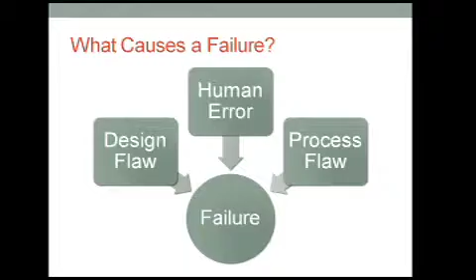Now, when you look at this simple diagram, the mirror image of this diagram are the components to success, right? What are the components of success? A good design, good product that you're using, a good process that you're using to assemble the products, and then, of course, execution, right? Flawless execution. And so those things are pretty critical.

And what I want to do is take a look in terms of those simple concepts at what apparently went wrong, I think, on this well, and then how do we go to build our practices going forward to try to keep this from going wrong again.

Okay, first off, and this one has been overlooked and maybe not stated as clearly as I'm stating it right now, the float equipment failed in the well. To me, that's very, very obvious as a drilling person. The float equipment failed. If the well blew out up the casing, the float equipment is there as a barrier, and it failed. Why did that happen?

Is there a design flaw in that float equipment? Were there process flaws that were involved in the selection of that particular piece of float equipment? Did something go wrong there, or was there simply a human error in the installation of that float equipment that kept it from working properly?

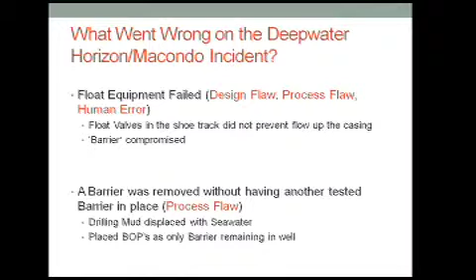When the float valves in the shoe track don't work following a cement job, that is not a good situation, and it's even worse when it goes unrecognized, which is apparently what happened in this well. So there's one barrier compromised. Did it cause the incident? No, it's the kickstart to the incident right there.

The second one that I have listed here, a barrier was removed without having another tested barrier in place. Now, throughout my career, that's what I was taught to not do. One of the fail-safe practices and processes that we have to follow as a drilling engineer is to make sure that if you remove a barrier from a well, there's another barrier in place before you remove it. That's a process that you have to follow to make sure that works right.

And that clearly failed in the Macondo. And that one is a pure process error. The sequencing of removing the drilling mud from the well and putting seawater in place was wrong. And that's a very severe flaw.

Now, as I'm going to show in a little while, when you start having process issues, these are issues that at some point the regulatory agencies have to come in and help prevent. And when the drilling mud begins to be removed, you've already compromised one barrier in the float equipment, you take the drilling mud out of the well, the last barrier in the well becomes the blowout preventers.

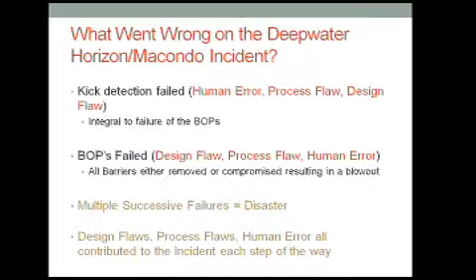And then finally, the BOPs failed. Now this, from my perspective as a drilling engineer, and a man that's been on the rig as a company man and has had people working for me that I've known for years as company men, that's a very terrifying thought to have a BOP fail on you, because that is your fail-safe.

So my question really is, what happened with the BOPs? I don't know that answer yet. I haven't seen any study outcome of what happened with the BOPs, but it's a very, very worrisome topic that you went to function the BOPs and they didn't work. And of course, in that system, is there a design flaw? We need to know that.

Is there a fundamental design flaw in the way the BOPs were thought out that doesn't work in deep water subsea environments? Were there process flaws in the way those BOPs were tested? Are we testing our BOPs correctly? And that's a comment I'll expand on in just a second.

And then, of course, finally, is there a human error component? And I would say in both of the cases of the kick detection and the BOPs, the kick detection, I think primarily human error and process error, probably equal amounts of both of those. Okay, but with the BOPs, I think design and process are probably the two key points of those failures.

Of course, what happened now, multiple successive failures, and people said this from day one of the blowout. You know, this wasn't one thing that went wrong. There were multiple successive failures that led to this disaster. And these are the four successive failures that happened in my mind.

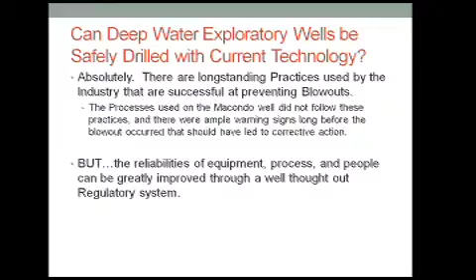Okay, in a conclusion slide, one question: can deep water exploratory wells be safely drilled? Yes, we've done it. There are a number of people sitting in the room who say, I do this every day. Is it 100%? No, I don't think so. I think there are people out there that don't have the capacity to do it safely well after well after

well. And I think that we're going to have to work with the government, with regulatory agencies, to get the reliabilities in our designs, in our process, and in our people up to speed to make sure something like this never happens again. Thank you very much.

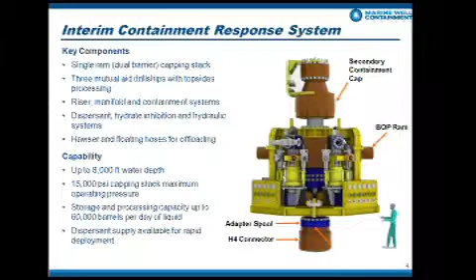Some of the equipment that is in the asset inventory for the interim response system obviously will move to the expanded response system as we get other assets for that system built and ready for deployment. But one main difference is the capture vessels. For the expanded response system, the capture vessels are dedicated vessels, where before it was the drill ships through mutual aid. In the expanded system, we'll have 2 modular capture vessels. I'll speak in more detail about them on a later slide, but they are dedicated for the service. They'll need to be modified for topsides processing facilities, and that's part of the scope in the project development of the expanded system.

This system will have freestanding risers and manifold systems, and that will enable it to operate in deeper water depth. It will also have a 15,000 PSI subsea containment assembly. In the expanded system, that assembly is a 3-ram or 3-preventer type capping assembly. In the interim system, it was single. The storage and processing capacity in the expanded system is up to 100,000 barrels per day of fluid. And again, the dispersant supply is dedicated and available within this system as well.

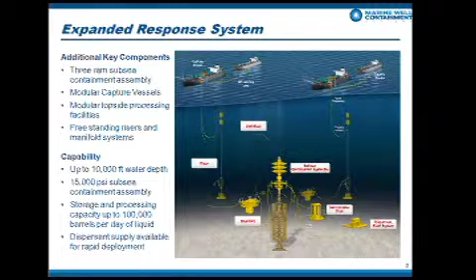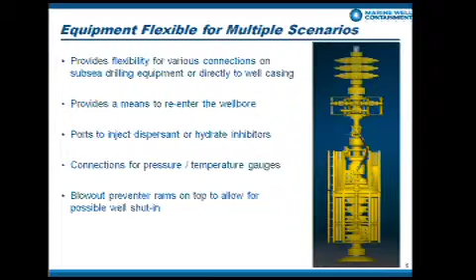I used the word flexible in an earlier statement, and that can be indicated by a component shown on this slide. This is a depiction of the ultimate expanded system capping stack. The idea is that we will have adaptation for this capping stack to be configured or mated to whatever conditions may arise on the day of deployment. It will provide a means to re-enter the wellbore. It will have a port for injection of dispersants or hydrate inhibitors, and connections for pressure and temperature monitoring devices. And we'll have containment type preventers in the stack to allow for a possible complete shut-in.

Some modifications are required, namely dynamic positioning systems, and these vessels need to be outfitted with topsides appurtenances to accept processing modules that connect up to subsea riser systems that allow the contents to flow to the capture vessels to be separated, the oil and gas separated, the gas flared, and then safely store and offload that oil to a shuttle tanker. The shuttle tankers are not part of the system.

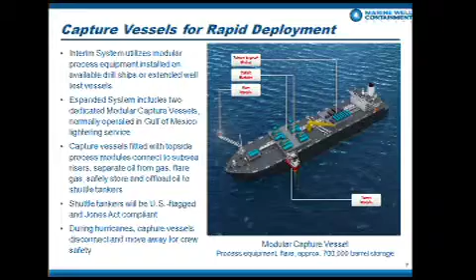Well, that's a quick run-through of what the company is about and the system that the company is interested in and also diligently working toward. And our view is that the company and that system will provide us a solution to meet the containment requirements and response requirements that we see in our drilling permit application requirements today.

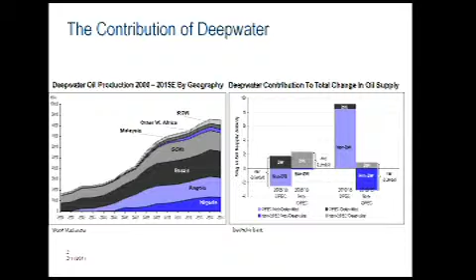So I think we heard very succinctly this morning about what's at stake when it comes to deep water. And you can see the remarkable growth on the left-hand side of the plot there of deep water production from the turn of the millennium through where we are today. This particular graph is forecasting 5 years into the future as well. On the right-hand side, a little bit difficult to see, but this analyst is forecasting that deep water will contribute about 25% of the incremental net oil production over the next 5 years. So there's a lot at stake, as it was said this morning.

With regard to technology, when you look at the graphs that I showed you on the previous slide, particularly the one on the left, you could come to the conclusion that this is a new industry, and in fact, it's not.

The offshore industry has been around since before the turn of the last century, 1897, as you can see, and even earlier than that, actually. And as pointed out this morning, just over 60 years ago, the first well was drilled out of sight of land, which was a very important point in the offshore industry.

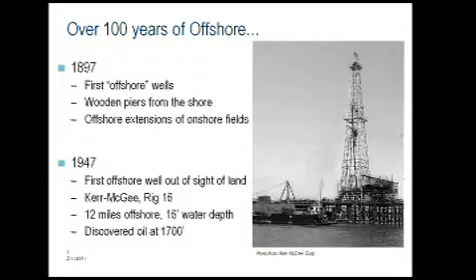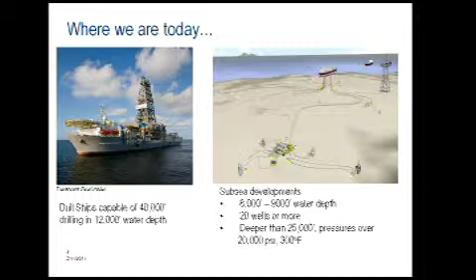So where are we at today? To me, the technology that we're using offshore is extraordinary. What the industry has been able to achieve is absolutely remarkable. A state-of-the-art development today would be in 8,000 feet of water, with 20 or more subsea wells, pressures at the reservoir, not at the wellhead, of 20,000 psi and greater, and depths certainly over 20,000 or 25,000 feet.

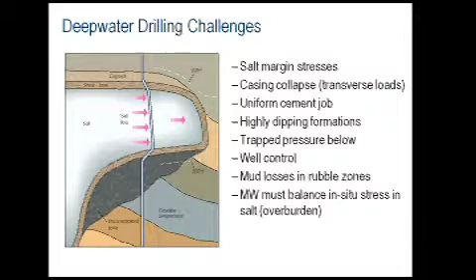In this particular case, for example, we might be required to drill through thousands of feet of salt. And as we exit the salt, we go into a different type of formation, often a rubble zone, and often a zone that is of lower pressure than what's required to drill through the salt. As a consequence, you end up with significant losses of mud, and that's just one particular example.

So in the context of this panel, I thought I would describe at least one technology, maybe a little bit different direction than some of the others have taken, that I believe can help manage and mitigate risk in deepwater operations, and that's the ability to understand what you're going to face as you're drilling through the formations. In other words, the ability to plan, to map out, to look ahead, and understand precisely when you're going to hit one of these transitions where things may be overpressured or underpressured, and may eventually result in issues that require a sidetrack, or worse, an abandonment of the well itself.

One of the technologies often touted as one of the most significant game-changing technologies in the industry, and very few would not rank it in the top 10, is 3D seismic technology. That's the ability to send acoustic signals, sound waves, through the ocean and then through the formation. That sound bounces off the various strata underneath and sends back millions of signals to an array of receivers at surface, or geophones. That information is compiled and analyzed with complex algorithms, and we can construct a picture of what is below us before we ever go there.

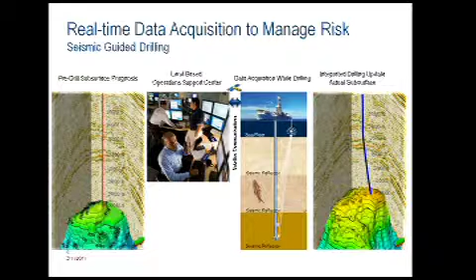The example I gave earlier, exiting the base of salt. If you're prepared for that, an operator can quite easily and safely and consistently make it through the base of the salt. If you're not, it historically has caused problems in the past.

Looking forward, I think as mentioned even by Director Bromwich here earlier, I shouldn't say there is no doubt, but there is a very good chance that we're going to go deeper. We're going to go for older geologic time horizons. And when you look at the technology, at least in the sector of the industry that I'm involved with, that has implications for sure. One, just around what I just described, we're going to have to image deeper with higher resolution, and that will be a challenge.

But another more practical matter is that the pressures, and in some cases the temperatures, of these formations are going to be higher and hotter. So the tools that we use to acquire this data and to drill this, and also the way that we complete these formations, are going to have to be capable of doing so in those higher pressure, higher temperature environments. So a big part of our new product development program, and certainly the new research that's gone on in the industry, is around exactly that, developing the higher pressure, higher temperature equipment. And you'll see that quite a bit of that has already come out over the last several years, and much of it is to come as we go forward.

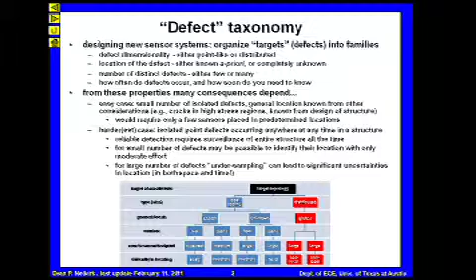Do you know where the defect is? Do you already know it a priori, ahead of time, by design of the structure, for instance? Or do you have no clue where it is? How many defects are you looking for? One, if let's say they're point defects, one or a whole lot? And how often do they occur? Once, or all the time, or once a month?

All of these things lead to a lot of situations if you're trying to design a new sensing system. The easiest case would be a small number of isolated defects where you know where they are. So by design of the structure of the well, hopefully you know where the float valves are, although you might not even know that. Cracks in structures: if it's a designed structure, then you probably know where the high stress regions are. You know where to anticipate cracks, so you put a few sensors there.

The hardest case, I think, is the case where you have the possibility of many defects, you have no idea where they're going to occur, and you have no idea how often they're going to occur. Now, if it turns out there's only a small number of them, you might find them with only a moderate amount of work. If there's a whole lot of them, and we just saw an example of this, when you start looking, you have to use a model to back calculate what happened. And you always get less data than you need. That's undersampling. And that means that there are always uncertainties. And then, of course, the question is, how bad are they?

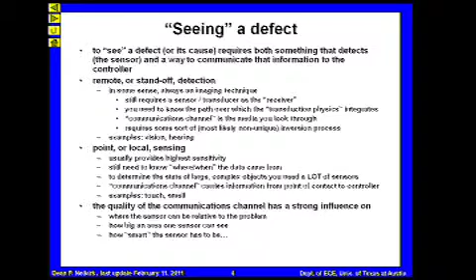You do have to know the path, and the example we just got was if you don't know the path, you don't know what's going on, so you iterate back and forth. That's a good idea. But it requires you to be able to communicate through some medium, and that's one of the big problems, that communications channel that you use to get information back and forth through. It's all about how good that channel is.

Okay? Examples: vision and hearing. You know what the problems are with vision. I can present you with an optical illusion, and what it is and what you see are not the same. Same thing with hearing, obviously. The medium impacts things. If you look at a pencil stuck in water, it looks bent, right? Because you don't know what the medium is. So there are real problems in using remote sensing. It's great if you can do it, but it's highly dependent on the communications channel.

Point or local sensing is nice if you can do it because it's where you need it to be. It's usually the highest sensitivity. You still have to figure out where it is if you didn't put it there ahead of time. If you want to do a big structure, you'll need a lot of point detectors, though. So there's a complexity there. The communications channel still has to be there. You have to get the information from the sensor to wherever you want to use it.

There, the examples I use are touch and smell. Your finger is a point sensor. It feels where you touch. Your nose is a point sensor. It detects a molecule that has been transported to your nose. The quality of this communications channel, though, is extremely important in determining where the sensor can be relative to a problem, how big an area a sensor can see, and how smart the sensor has to be. And I'll come back to that in just a sec.

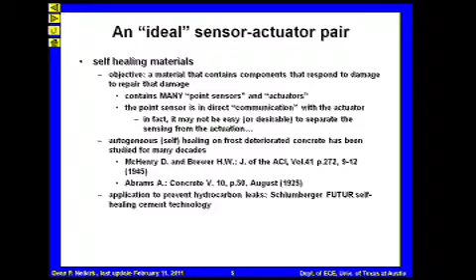An example of this is so-called autogenous self-healing in concrete. That's been studied for now 90-ish years for frost damage. And there's been a lot of interest in this, and Schlumberger has a new product, the FUTUR self-healing cement technology, which has materials added to it that expand when exposed to oil or gas to try to plug the crack if there's a void or a crack that forms later. It's a great example of what you'd really like if you can get it.

Now, another issue here is what can we manage to do? And I do a lot of work in civil infrastructure as opposed to oil exploration. And in that case, one of the standard statements is with power and money, you can sense just about anything. Now, by power, I mean how much power you have to run it. By money, I mean how much it costs to install it. In civil infrastructure, money is a big determiner of what you'll put into a civil structure.

If you're doing remote sensing, you probably have a complex receiver. Your eyeball is a pretty complex receiver. In terms of the power issue, though, if you've got a bright enough light bulb, you can see through even muddy water, at least a little ways. So there's still a power issue when you deal with a bad communications channel for remote sensing.

For point sensors, the traditional way in the oil business has been to use wireline tools. The nice thing about wireline tools is that essentially you have a really good communications channel, the wire, and you have an easy way to supply power to the tool, the wire. So wireline tools are really nice, again, if you can use them.

I don't know exactly how you use a wireline tool during a cement job. I just don't see how you can do it. I don't think you do. But if you can get away with the wireline tool, it's great. To do the cement survey after emplacement, it's a wireline tool, an acoustic wireline tool.

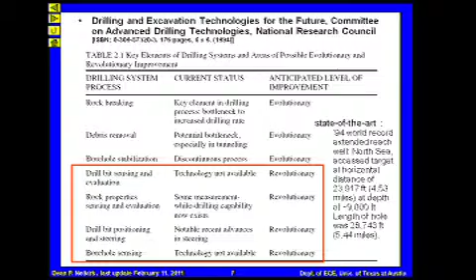There is another consortium that's kind of working on a related issue. This is the Advanced Energy Consortium, of which some of your companies are members. This consortium is focusing on pre-competitive research, primarily done at universities, in nanotechnology materials and sensors, but the focus is recovery, not the drilling operation itself, but recovery. And it's really pretty exclusively recovery. I happen to have a project under this flag for doing sensors that we would want to put into formation, although near the borehole, and hence the title.

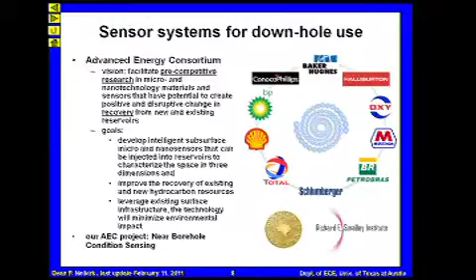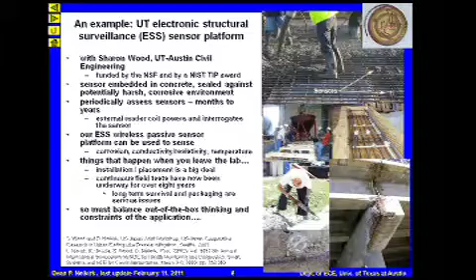And we've done a lot of work with these sensors that have to be placed in concrete to try to come up with a way of reading through the concrete to detect corrosion, for instance. We've also done conductivity and some other things. But it's an example of trying to come up with sensors that you can use in a harsh medium.

Other things that we might try to play with: the cement job was clearly an issue, and one of the questions is, can you put something as an admix? Well, ideally you'd like it to be an admix in the material, but could you put sensors in the cement? It's a tough problem. Can you instrument the casing? And that also, I think, is a real problem from the perspective of placement and damage done during the drilling operation. I think it's going to be a really hard problem, but one well worth looking at.

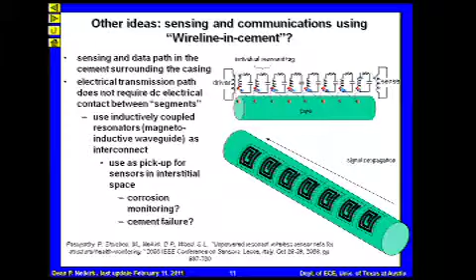Doing all this, you've got to know where, if you're placing these sensors after the fact, for instance, mixed in the cement, you pump it in. If you don't know where things are, it's not going to do you any good. And knowing where is a really hard problem from an instrumentation perspective. You need position and time.

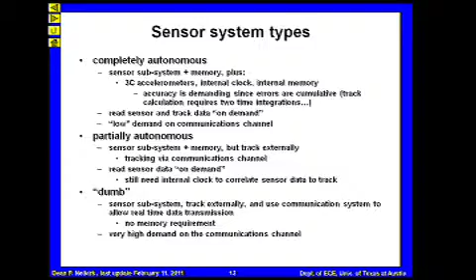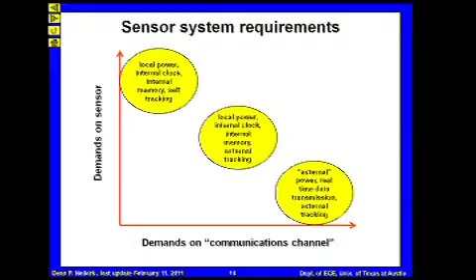It's much better to be in remote sensing if you can, but the problem there is the communications channels are limited. We're interested in trying to explore other ways of communications. And that's my last slide for today.

Thanks. Thank you. Then let me ask the speakers to come take the seats while we have some specific questions for the current speaker. So the floor is open for the specific questions to Dean. Any questions? Okay, then.

Okay, so what we're going to do now, you've heard from all of the speakers about some of the new technologies. Now this is an opportunity to hear from you, and you ask these speakers, maybe beyond what you heard them speak, what do you think will be the new technologies that will make offshore operations safer in the future? And so we have two microphones. Please go use the microphone and ask your question to the speaker, and we'll let whichever of the panelists wishes to respond answer your question. So the floor is open.